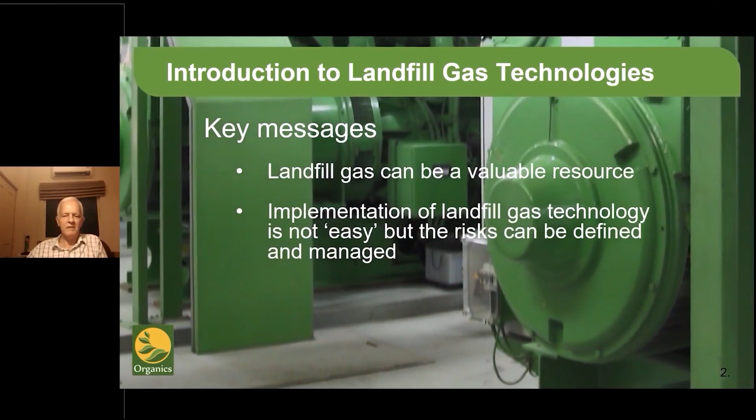There will, in fact, be many key messages in this presentation. However, over it all, the one thing we can say with confidence is that landfill gas can be a valuable and viable resource. Whilst landfill gas is not exactly easy, attention to the major pitfalls that are now well known can ensure both bankability and a successful project.

The Organics Group started out in 1985 when there were still questions about what exactly landfill gas was. An early debate with one customer was illuminating on pipe sizing. Should we use half-inch pipe or 3/4-inch pipe for a landfill gas collection system? That was the question. Emotions ran high as the cost difference was significant in percentage terms.

Eventually, this project evolved to using 10-inch pipes after many years of ever-increasing yields. This highlights how little was known about gas production. From this early caution, we have seen expectations grow exponentially, to the point where landfill gas sites are sometimes seen as gold mines. The truth usually lies somewhere in the middle, although it is fair to say that some projects have been akin to gold mines.

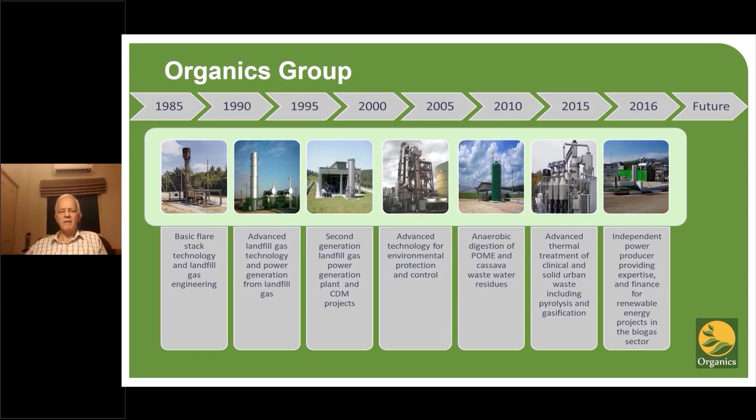There are many people around the world living in luxury off the back of landfill gas. There are, unfortunately, quite a few licking their wounds. From landfill gas, the Organics Group moved to leachate treatment in the late 90s, as well as pyrolysis and gasification. We're now focused on thermal ammonia stripping, refuse-derived fuel, biogas, and of course, landfill gas.

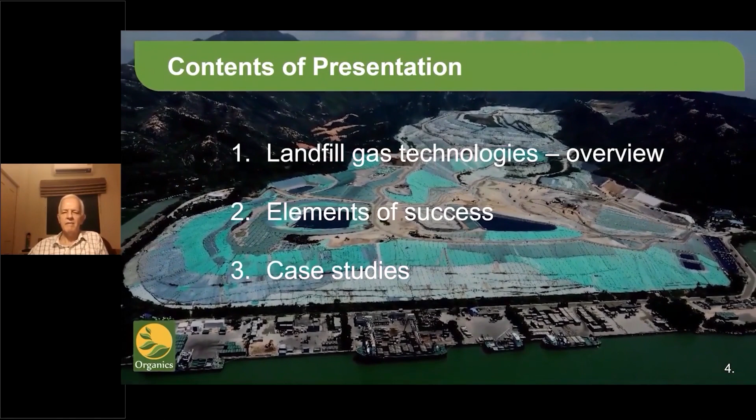The contents of the presentation are split into 3 sections: an overview of landfill gas technologies, a review of the key elements of success within a landfill gas project, and finally, a review of some projects with which we have had an involvement, both successes and ones of mixed performance.

In this section, I'll give an overview of the main elements of a typical landfill gas project. The intention isn't to provide a great deal of detail, but to set out the framework within which landfill gas projects are built and operate.

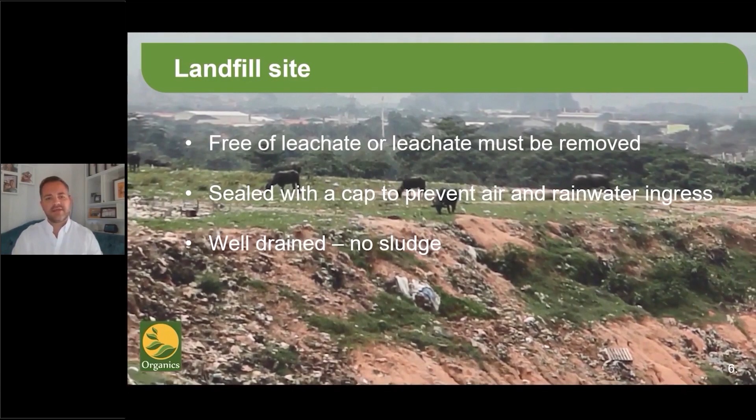Landfill sites come in many shapes and sizes. The main requirement, as far as landfill gas is concerned, is that the landfill doesn't leak. This slide shows one slope of a project where a landfill gas system was installed. Unfortunately, it transpired that the slopes were like giant holes and let in large quantities of air, diluting the gas and killing off the anaerobic bacteria.

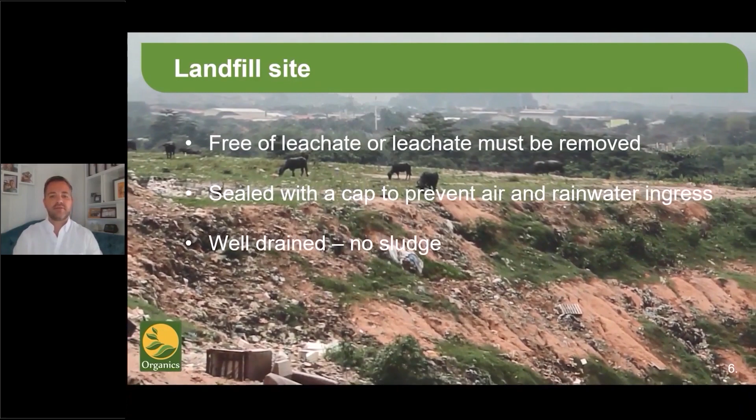So the question is, what's required of a landfill site? First, it should be free of leachate, or leachate must be removed. It must be sealed with a cap to prevent the ingress of air and excessive rainwater. It should be well drained. Landfills filled with sludge are not of any use for landfill gas extraction. There are many other requirements, such as good access and some degree of stabilization, but these are the main non-negotiable requirements.

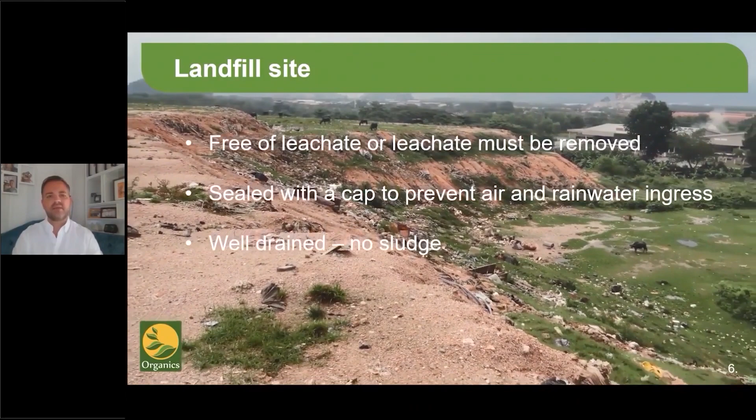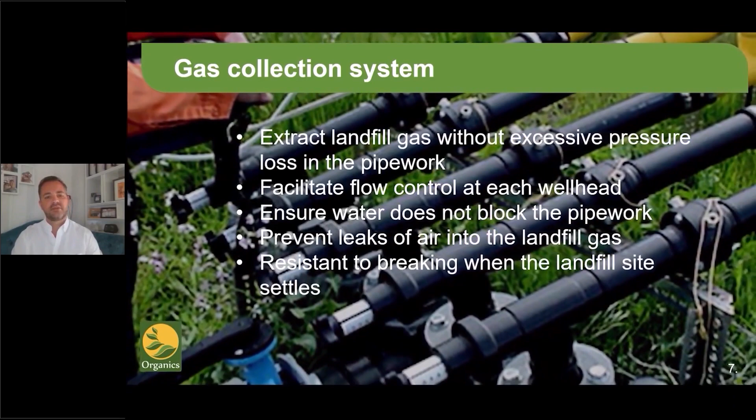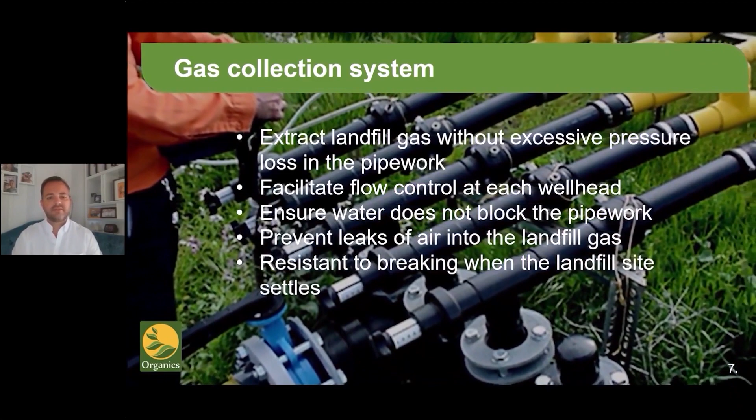One thing that's required is you need to extract landfill gas without excessive pressure loss in the pipework. You also need to ensure water doesn't block the pipework, prevent leaks of air into the landfill gas, and lastly, the system must not break when the landfill gas or landfill site settles. There are many more detailed requirements, but these are just amongst the main ones.

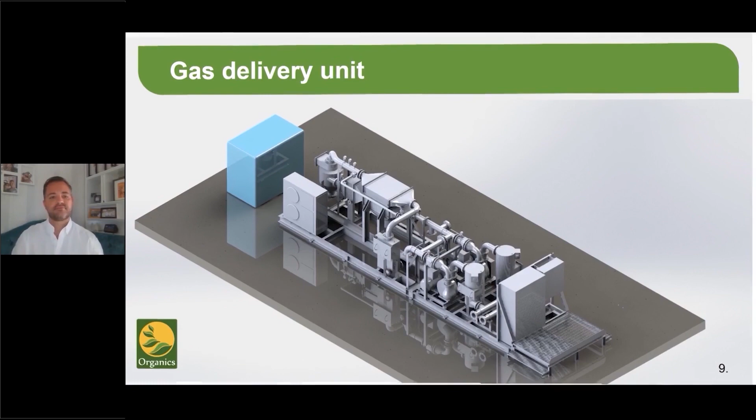Now this view shows the other side of the same unit, where you can see more clearly the counterflow heat exchanger inlet, in which hot gases reheat outgoing cooled gas to drop the relative humidity. The dewatering chiller can also be seen more clearly. It uses a compact finned tube block, which has a high rate of heat transfer compacted into a relatively small space. The blue unit you see there at the end represents the refrigeration unit.

Now, this is for the gas dewatering unit. This is a unit we supplied to China several years ago. In this case, we used a shell and tube heat exchanger for the dewatering of gas, as you can see here. This is a viable alternative, but it just takes up a little more space. The condensate collection pot can be seen at the end.

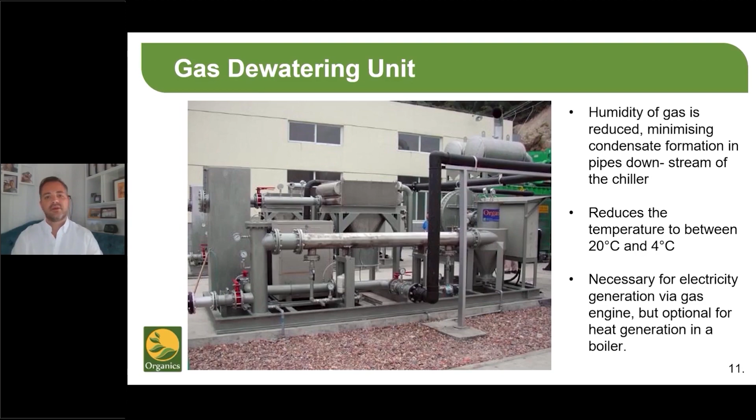We generally like to reduce the temperature down to 4 degrees centigrade, but less than 20 degrees centigrade, it's still workable. The cooler the gas, the better the control of trace gases and moisture.

Now for the gas blower, there are several types of blowers suitable for landfill gas, but generally we prefer centrifugal blowers unless a high pressure is required. So above 500 millibar, the blower may need to be a roots type blower, and above say 1.5 bar, we would opt for a screw compressor.

It can be variable from as small as 50 cubic meters up to 20,000 cubic meters per hour, or even more. So what are the key requirements from a gas blower? The first thing is to facilitate flow control, also to accept a certain amount of moisture, not to corrode, to run continuously for a number of years without breaking down, and lastly, not to leak. So those are some important things to consider.

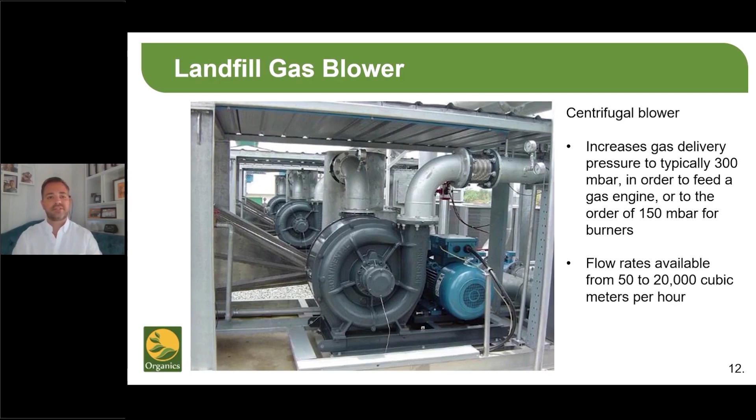Hydrogen sulfide can damage boilers and gas engines very quickly unless it's removed or unless great care is taken while it's being used. The bioscrubber also reduces hazards to health.

Hydrogen sulfide is a very highly toxic gas. Comparatively small amounts can kill you outright. 800 ppm, for example, is a lethal concentration for about half of humans for about 5 minutes of exposure. And concentrations over 1,000 ppm could cause immediate collapse, loss of breathing, and even inhalation of a single breath could kill you.

Now, removing hydrogen sulfide from biogas reduces emissions of sulfur dioxide. The bioscrubber also reduces noxious odors. A typical bioscrubber can remove about 98% of hydrogen sulfide in biogas. Basic requirements of a biogas scrubber include reducing H2S to levels of 200 ppm typically. It should not be expensive to operate, needs to be cost effective, and to minimize downtime.

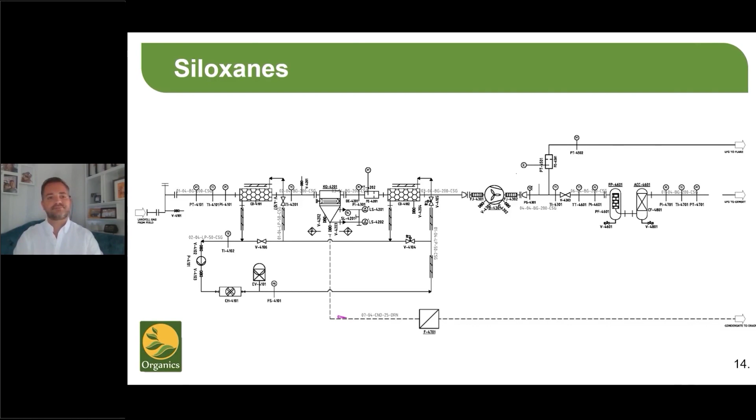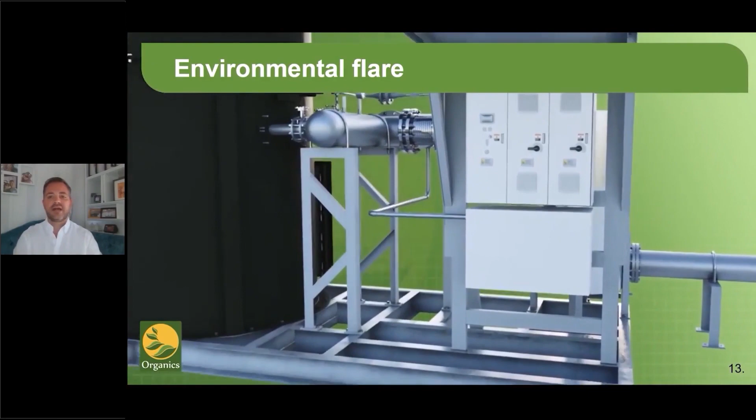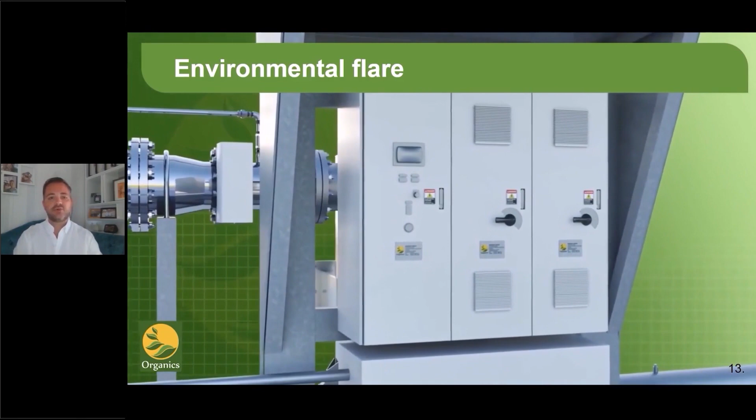It started out in this form to tackle landfill gas trace gases, such as benzene, halogens, and vinyl chloride, all of which can be detrimental to human health. Now, more recently, it's been used to control emissions of methane for greenhouse gas control. Open flares can have up to 15% methane bypassing the flame, whereas in this case, destruction of methane can be well over 99%.

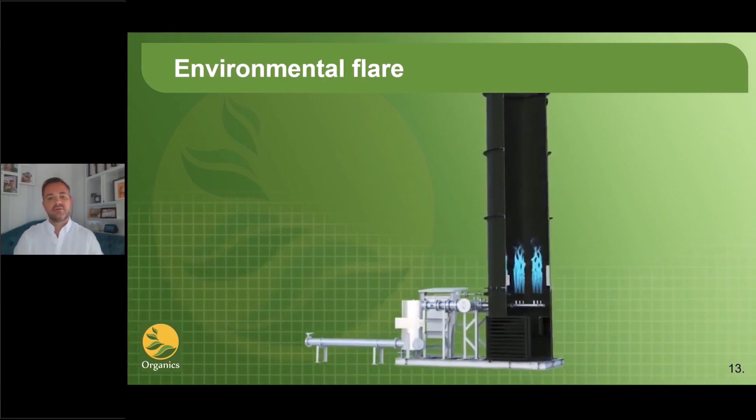Is held at a minimum temperature, typically around 1,000 degrees centigrade, for a minimum period at this temperature of 0.3 seconds. So these are the standard conditions required to be met by the UK Environment Agency.

Where it is viable, that means there must be a viable FIT, or feed-in tariff, as well. So in such a situation, there needs to be a reliable off-taker who will take 100% of the power produced in a 24-hour period.

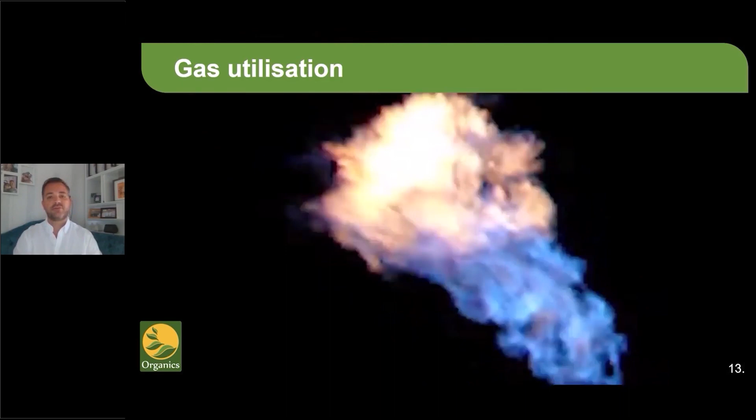Hi, I'm going to cover some of the elements of a successful landfill project. I'm going to cover management, feasibility studies and design. My colleague Brian Johnson will cover construction and operation.

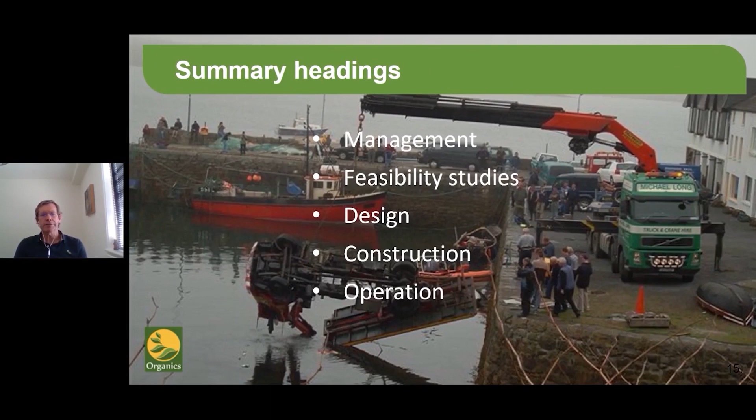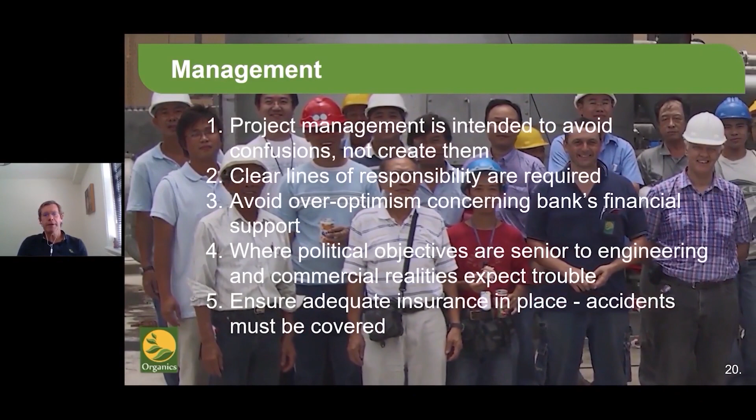In terms of project management, it's intended to avoid confusions, not create them. Clear lines of responsibility are required between the parties, including owners of the landfill, the equity partners in the landfill gas energy business, normally referred to as perhaps the IPP or independent power producer, the lenders, the technology providers, and the overall system designer and integrator.

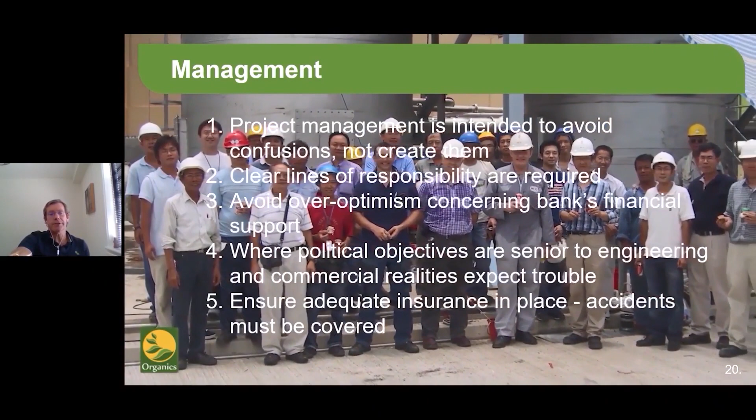We need to avoid over-optimism in terms of overstating data when it comes to attracting equity and investors and the bank's lending support. And where political objectives are senior to engineering and commercial realities, you can expect trouble. And last but not least, need to ensure adequate insurance is in place. Unforeseen events and accidents have to be covered.

Clearly, the feasibility study is the start of a project, and it's extremely important to get it right. In terms of the things that needed to be covered, it's essential to correctly estimate the ongoing maintenance costs in advance. The project has to have an adequate feed-in tariff, and really it needs a very robust and correctly interpreted financial model.

There has to be a viable leachate management plan in place, and a good capping for the overall site is essential. It's important to look at the history of how the landfill's been maintained and planned, and correlate that with what's on the ground. And finally, a correct gas production estimate is critical.

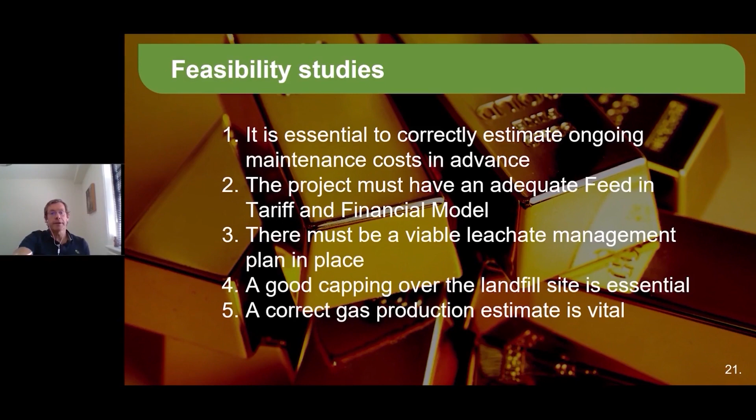Now, talking about gas production estimates, there's quite a lot of information to consider, but you need an honest interpretation of the mathematical models, decide whether a pumping trial or no pumping trial is going to be required, avoid optimistic interpretations of results in the initial site assessment. A valid assessment of waste degradation curves and yield modelling is important.

Accurate waste tonnages and composition. Pressure from investors to enhance the gas production expectations mustn't be supported. Correctly define the genset's efficiency and availability, and carefully check the landfill history for fires, etc.

Look for signs of ongoing or unaddressed fires. Typically that might be elevated levels of CO, carbon monoxide, or hydrogen, or indeed hotspots that may be obvious on the ground.

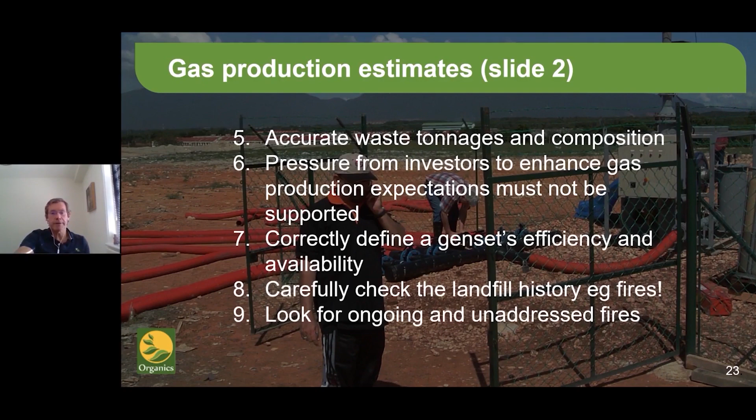Regarding landfill gas production curves, there are 5 distinct phases of waste decomposition within landfill, following the arrival and deposition. The first phase is relatively short, being the aerobic phase where free oxygen is consumed by aerobic bacteria, and the production of hydrogen commences at the same time.

Once all the oxygen is removed, the waste decomposition moves into an anoxic phase where carbon dioxide is produced. This can last up to about 6 months. The third phase represents the commencement of methane production, the reduction of carbon dioxide production, and it's the commencement of the growth of the methane-producing bacteria.

Phase 4 is the full methanogenic phase, where methane is produced in the maximum quantities and the gas can be recovered from the waste. In the final phase, methane production starts to decline. When this happens is extremely variable. The rule of thumb is 7 to 10 years, but it could be as little as 2 or 3. The duration of all these cycles can be anywhere from about 10 to 80 years or more, depending on the quantities of waste in the landfill.

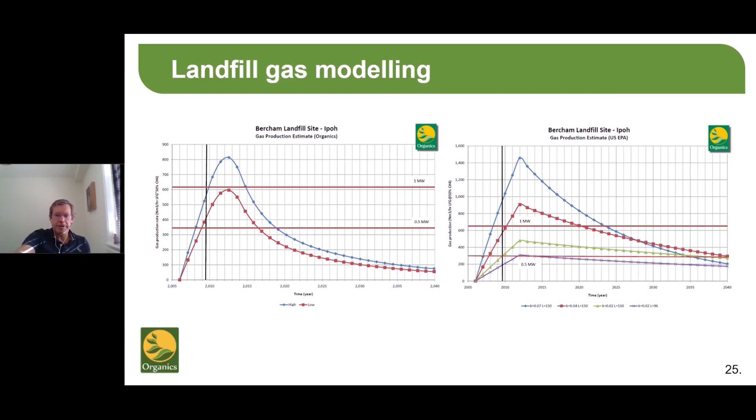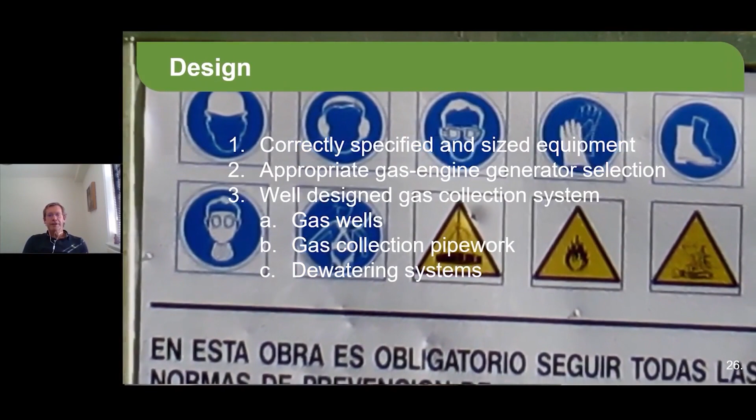In terms of design, this is of paramount importance. Landfill gas technology is largely well defined with many suppliers. It's the integration of the systems where the problems arise. It goes without saying that equipment should be correctly specified and sized, but it remains an area of difficulty too frequently encountered. The gas engine must be suitable for landfill gas and should be well proven and have a good track record.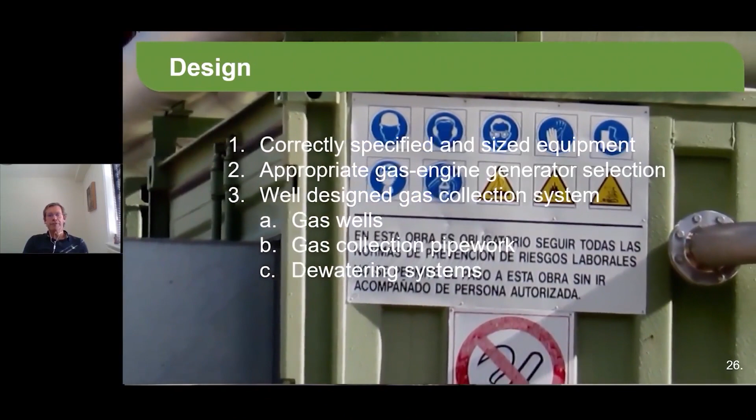Similarly, collection of the gas and the fuel transport system should be built for purpose. Gas wells sunk into leachate, for example, will not produce landfill gas, obviously.

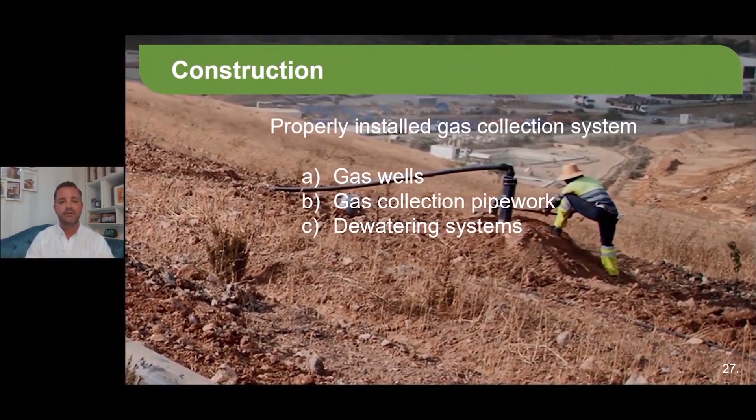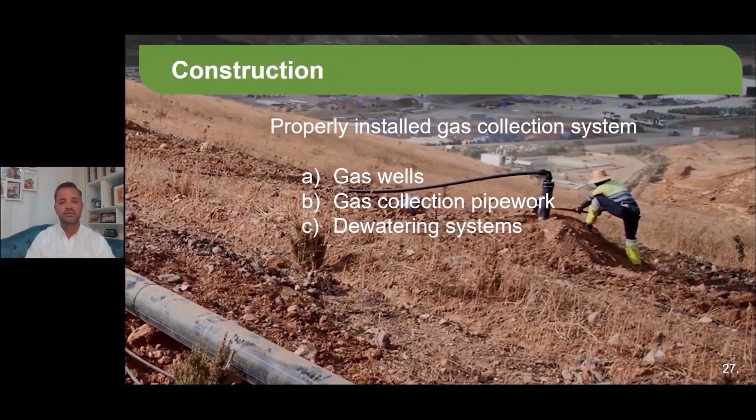We would all like to think that construction wouldn't be a source of fundamental difficulty. However, some issues that can be encountered include wells not drilled to the required depth, but simply to first contact with leachate; horizontal pipework laid flat, resulting in water sealing when settlement occurs; dewatering points out of which water cannot flow, leading to the dewatering pot flooding. Another issue is full-face gaskets left in a pipe, blocking all flow from that leg of the gas field, poorly found and out of sight, and lastly, incorrectly sized pipework and valves blocking collection flow.

So that's just to name a few. It's clear that construction works should be monitored and recorded. A good design can perform like a bad one if it's installed incorrectly.

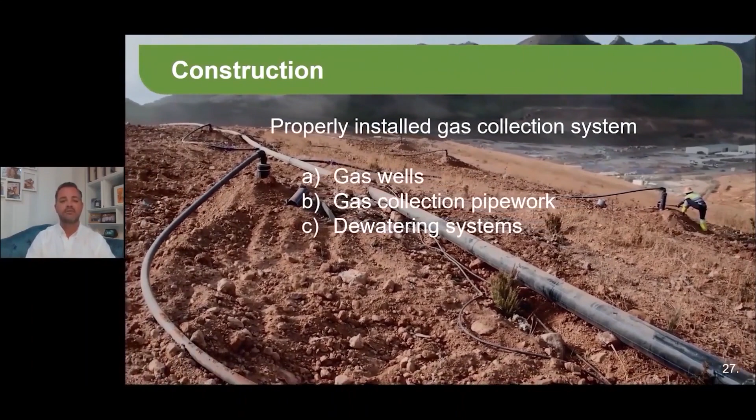It's often said that a good operator can make a poor installation run well, and that a bad operator can destroy a good installation. After assessing feasibility, designing and installing a good system, it will now be critical to ensure operation is attended to with equal attention to detail. There are many aspects that come into play here. This and the next slide highlight some of the main issues encountered, which need to be attended to for operation of a landfill gas project to be successful.

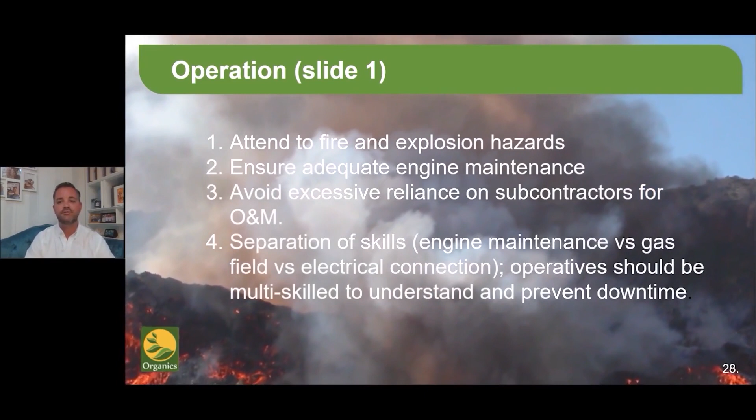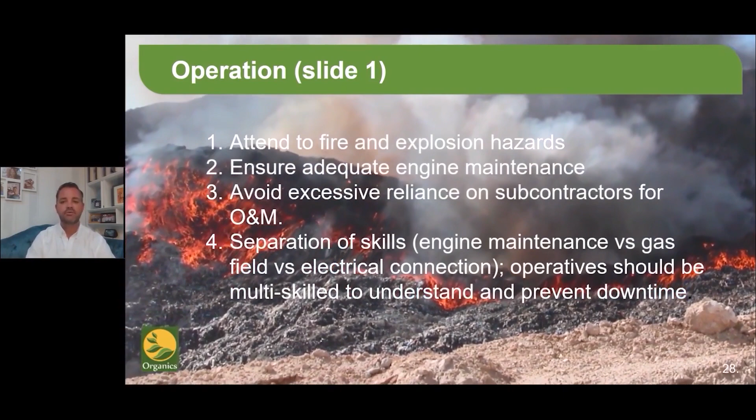Fires, engine maintenance, and the like are basic. Because landfill gas requires multiple skills, it's important to have in-house technicians who can work across technologies. Subcontracting out skills should be undertaken with great caution. For example, if there's a problem with a gas well which translates into a problem with the gas engine, an engine technician may or may not understand what's going on. But a staff member who works with the gas collection system and the engine will see the connection immediately.

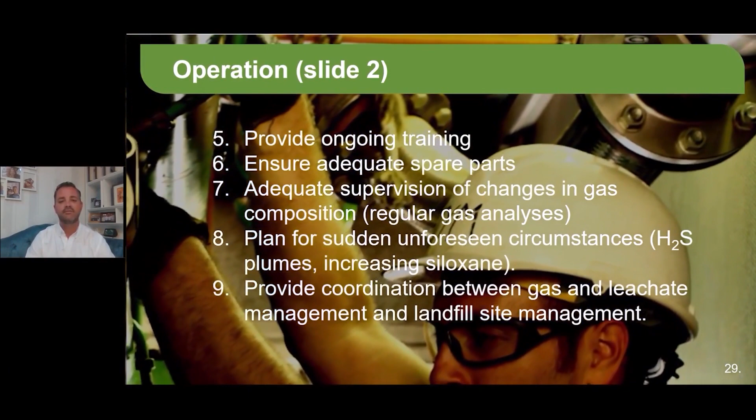So to this end, staff training should be recognized as fundamental and should be ongoing. Site technicians will never learn everything about a system, but the more they learn, the less downtime is experienced and the more job satisfaction they will have. Being ready for the expected and the unexpected can be planned for, so if and when this does happen, it's immediately and comprehensively addressed.

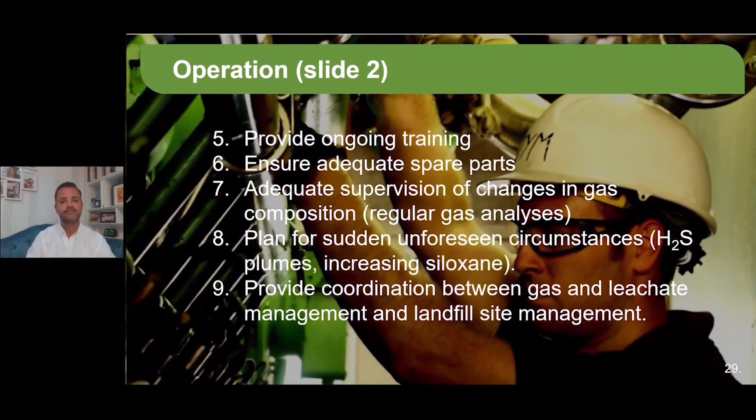One problem that's often encountered on active landfill sites is the coordination, or lack thereof, between the landfill gas operation and the landfilling operation. Problems can always be managed professionally through regular coordination and cooperation. Hoping for the best shouldn't be a management strategy.

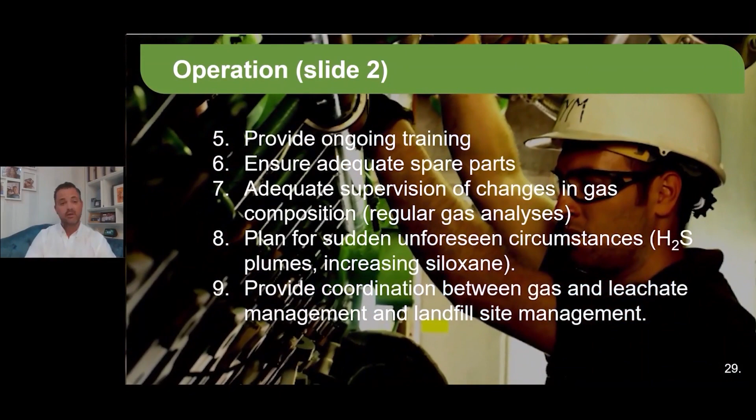Leachate, unfortunately, is a problem that must be addressed in many landfill sites. Even with good basal draining, perched leachate will still be found and generally provide difficulty in extracting landfill gas. Leachate must be managed from the outset.

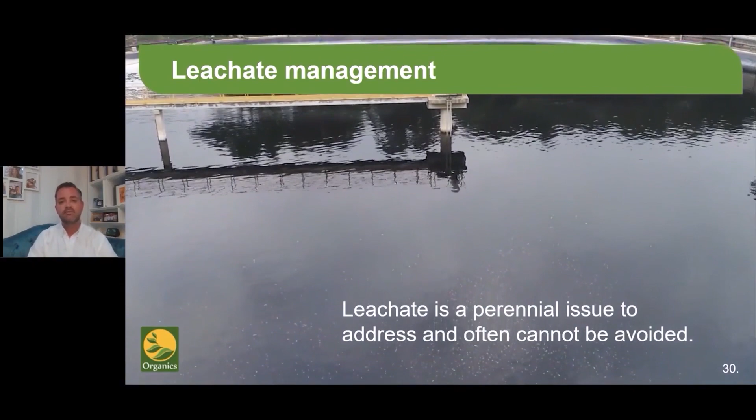If necessary, it may be removed using gas wells. Once removed though, it needs to have somewhere to go. It's sometimes surprising how much leachate comes out of a site. So this may result in the need for holding lagoons and treatment facilities so the leachate can be discharged to a watercourse or wastewater treatment works.

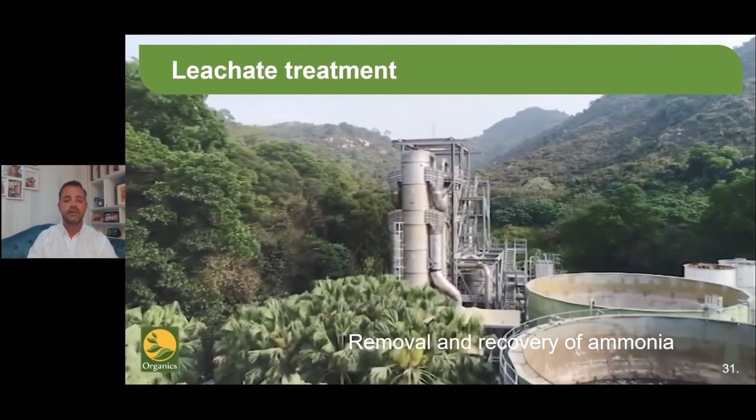Leachate treatment is a huge subject in itself, but suffice to say, treatment since the early 90s has most commonly found that the activated sludge process is the dominant technology used, in various forms. A sequencing batch reactor is one such system that is used.

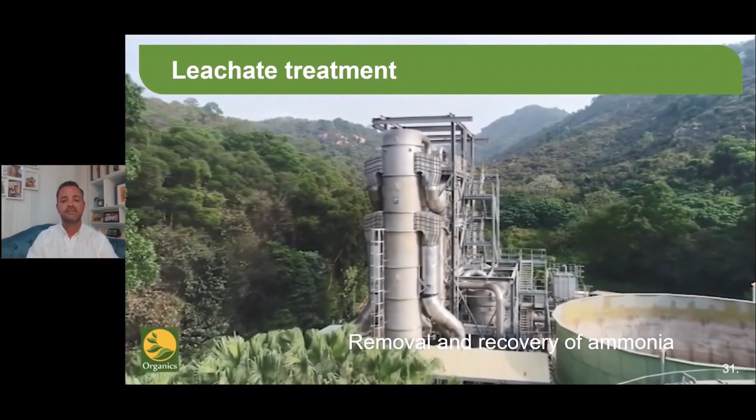This can be added as a separate piece of equipment for removing ammonia and other trace compounds, such as heavy metals. Organics has also developed a patented thermal process, which can run on the waste heat of gas engines to remove ammonia and recover it for use or sale as a traded commodity.

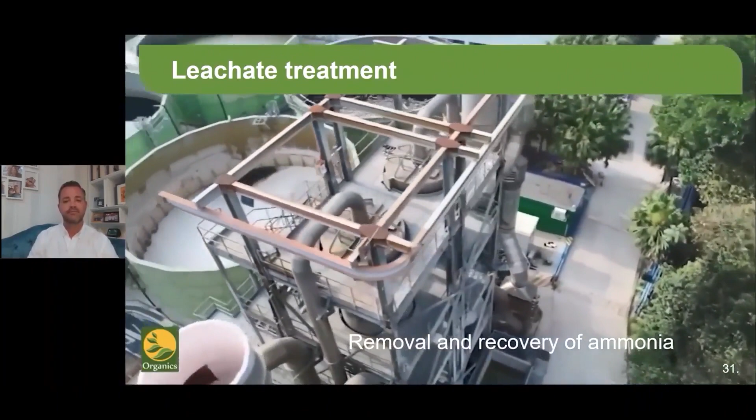There are several brands of engines which have a proven track record running with landfill gas. Jenbacher and MWM Caterpillar are a couple of the main ones. Other engine suppliers such as Guascor or Shandong are also gaining traction in the market.

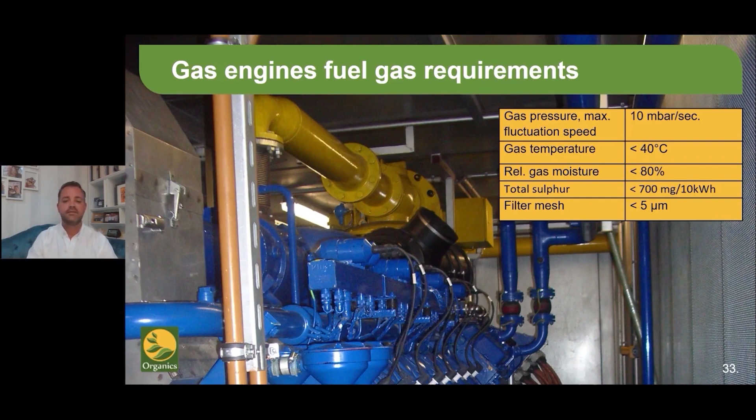Siloxanes are another engine gas contaminant that can seriously damage a gas engine. It's the nature of the beast that siloxanes can appear or disappear from a specific landfill gas flow. So care is always required to see the telltale signs, which can be seen in the oil, in the piston heads, or the turbocharger.

In this part of the presentation, we'd like to bring you some real-life experiences with projects from various parts of the world.

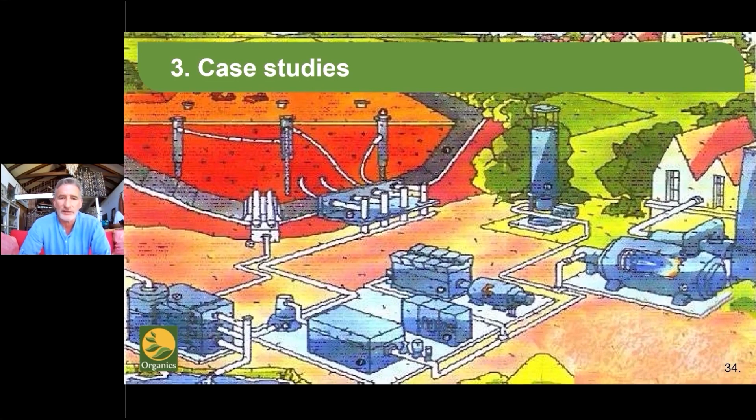Analysis as to what went well and what went wrong is not something that we can do in such a short discussion, but we can give some of the main headlines, such as how much waste was in place, how much gas was anticipated, and how much was actually achieved. There are a great many successful projects in operation now in many countries, but there has undoubtedly been quite a high rate of failure for reasons previously discussed by my colleagues.

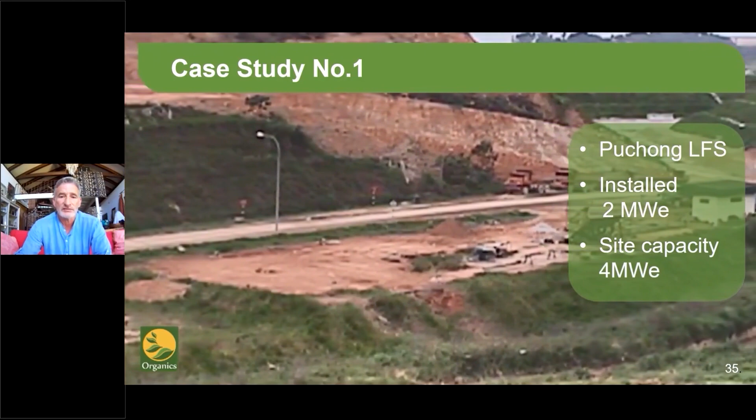In this first project, this is an early image of the Puchong project in Malaysia, taken shortly after commissioning. A feasibility study was performed by the client, TSPL. It was agreed to install two 1 megawatt Jenbacher gas engines, and the site was active and had about 4 million tons of waste in place. So according to the rule of thumb, it could have produced 4 megawatts.

The project was a technical success with plenty of gas. There was a requirement to remove leachate from the gas wells, and this was done very easily. The project won first prize in the Renewable Energy Project Competition on-grid category at the 2005 ASEAN Energy Ministers Meeting in Siem Reap, Cambodia.

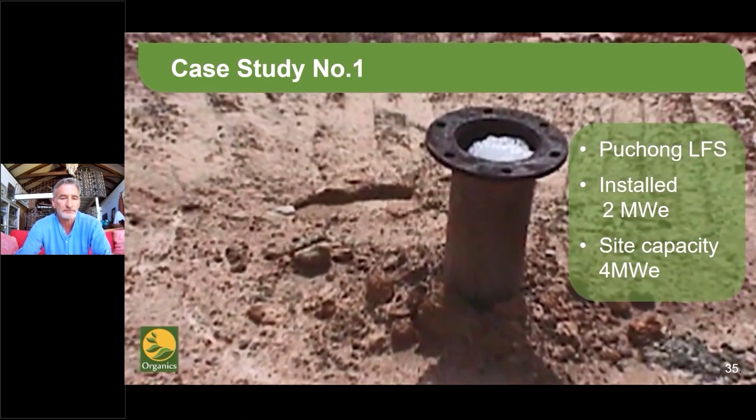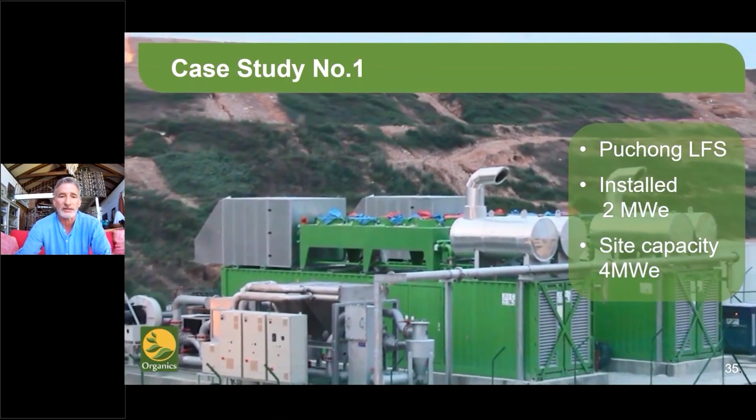One difficulty that did arise was that the feed-in tariff was quite low at the outset, feasible but low. During implementation of the project, the euro rose in value, and the budget set in Malaysian ringgits was stretched to the point that the operating budget was used to pay for capital equipment. This resulted in some difficulties during operation, but I'm happy to say that these were resolved, and the project is still in operation 15 years later.

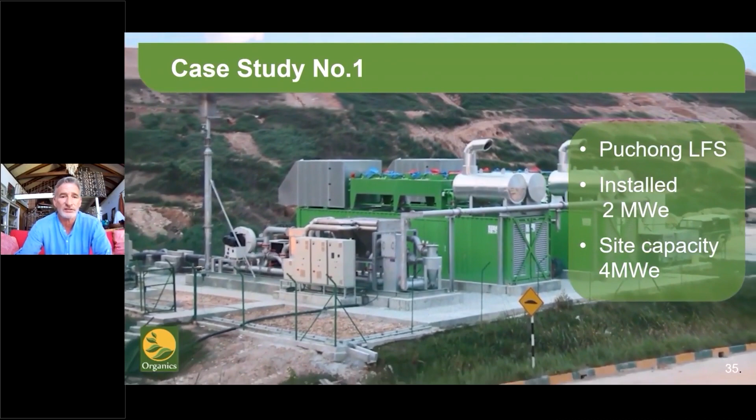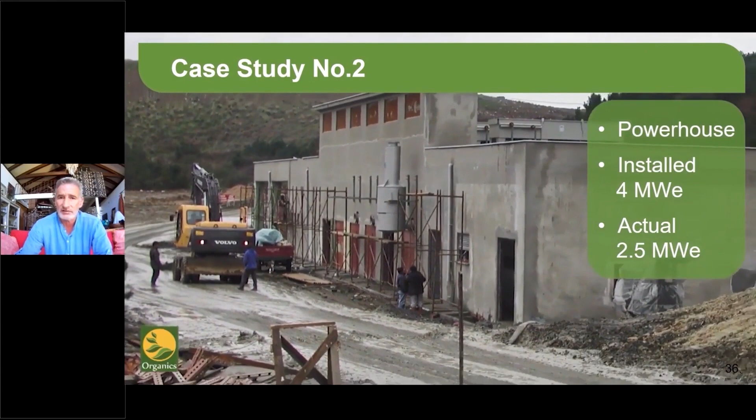The next example was a project built in Turkey in the year 2000. The waste in place was in the order of 6 million tons. A pumping trial was performed by others, and the results indicated that 6 megawatts could be generated. So it was decided to install 4 to be on the safe side. These were 1 megawatt Jenbacher gas engines, and space was left for an additional 2 engines as long as there was adequate gas.

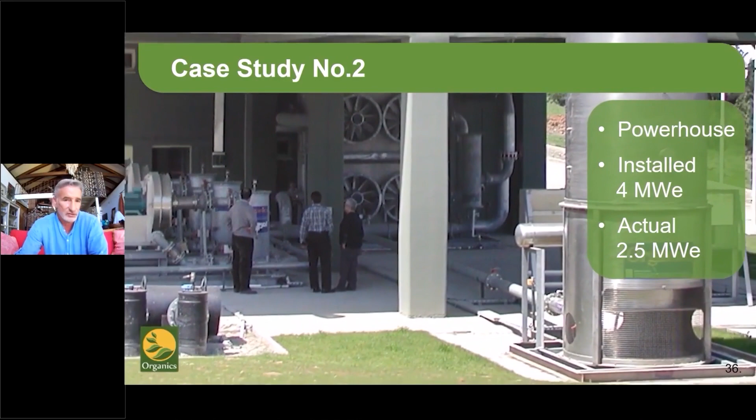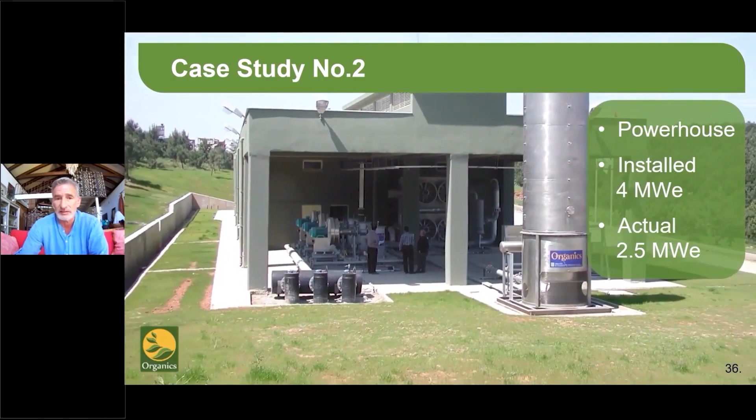In practice, after everything was installed and operational, it was found that the maximum capacity that could be generated was 2.5 megawatts. The shortfall was probably due to the fact that the pumping trial didn't cover the full area of the landfill, and the missing sectors were probably not as productive in gas generation as the ones tested.

Nevertheless, as the project was owned by the city of Istanbul, where a certain Recep Tayyip Erdogan was the mayor, the project was declared a success and continued in operation.

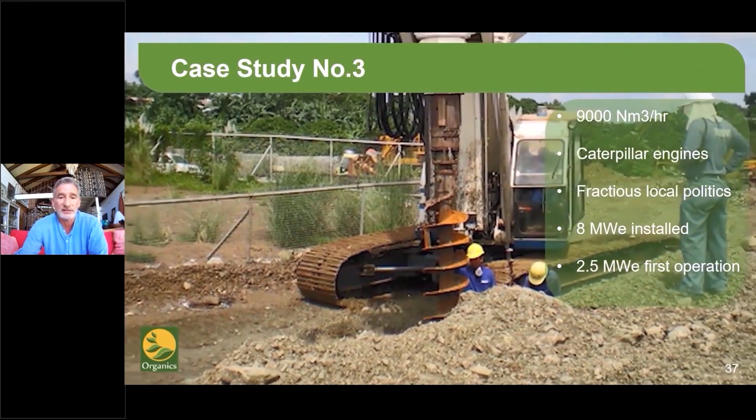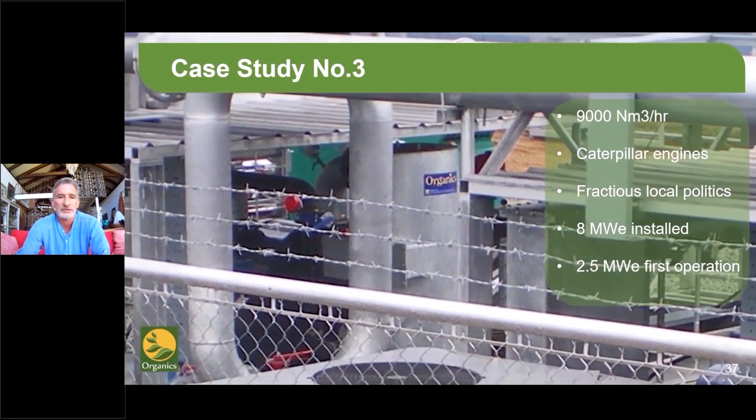The next project was installed on a site where a pumping trial carried out by others had indicated that the generation potential was 35 megawatts. There were approximately 6 million tons of waste in place. Following organics involvement, this was revised down to 4 megawatts, a maximum quantity. In theory, the site might have been able to produce 8 megawatts if the waste had been landfilled correctly.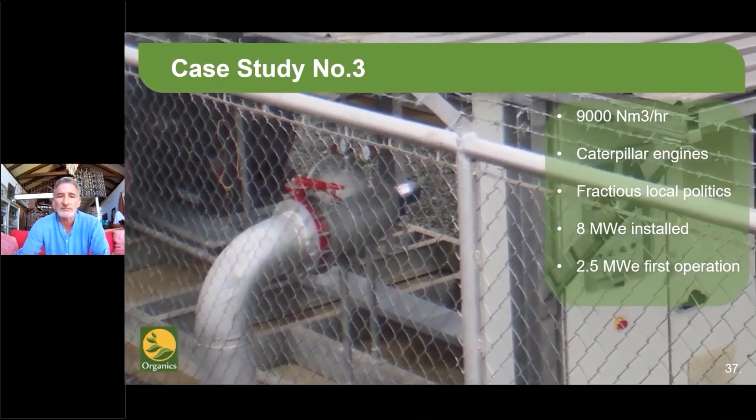But in fact, it had been an open dump for much of its life. In the end, pressure from the investors led to 8 megawatts being installed, and at first operation, the site produced only 2.5 megawatts. The great saving of this project was that the site was active, and the waste coming in was coming in at the rate of about 4,000 tons per day. It eventually reached full capacity and is still in operation.

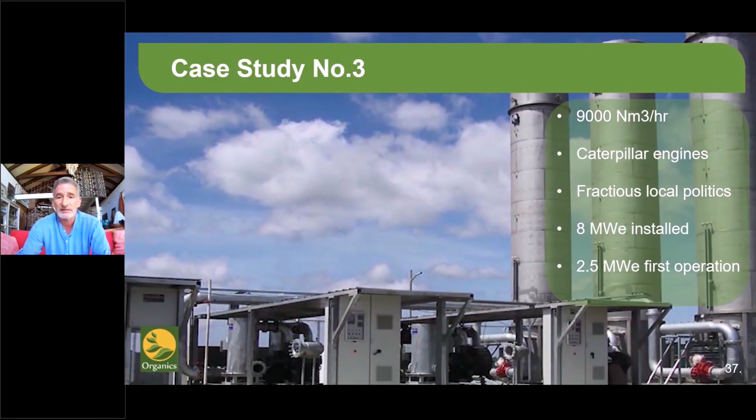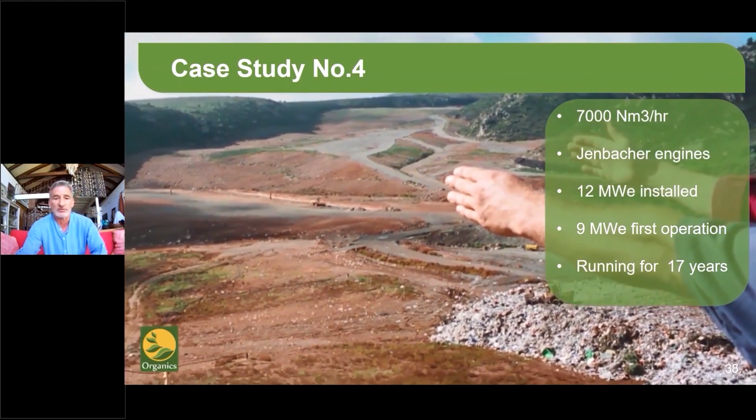Our next case study is a landfill gas utilization project installed at the Garraf landfill site near Barcelona, Spain, a landfill with around 40 million tons of waste in place. After a public tender, 12 1-megawatt Jenbacher gas engines were installed and commissioned in 2003.

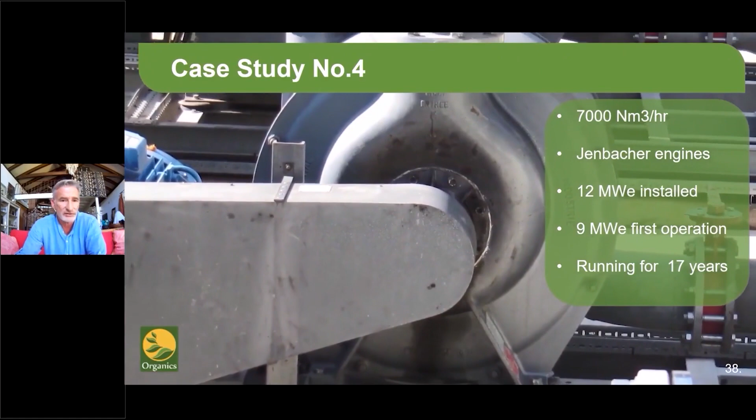The site was closed to waste input in 2006 and restored to a high quality, a process that involved importing large quantities of earth. This caused the leachate in the site to rise up in the gas extraction wells and reduce the collection efficiency of the gas extraction system.

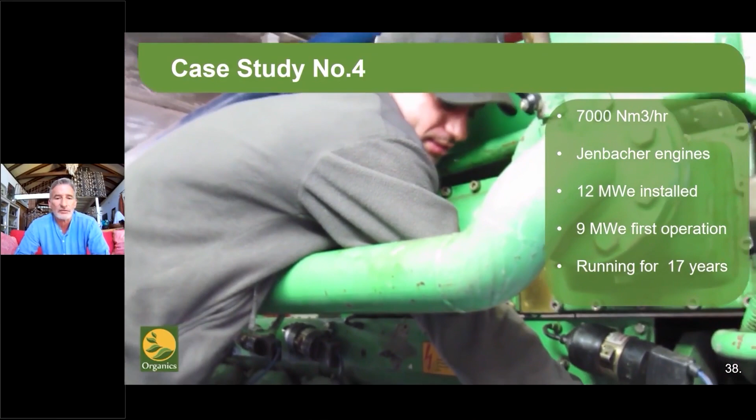During the commercial lifetime of the project, the maximum number of engines achieved was 9 megawatts. However, due to the acceptable feed-in tariff, the project was successfully operated until the end of the contract, after which the plant was transferred to the city council.

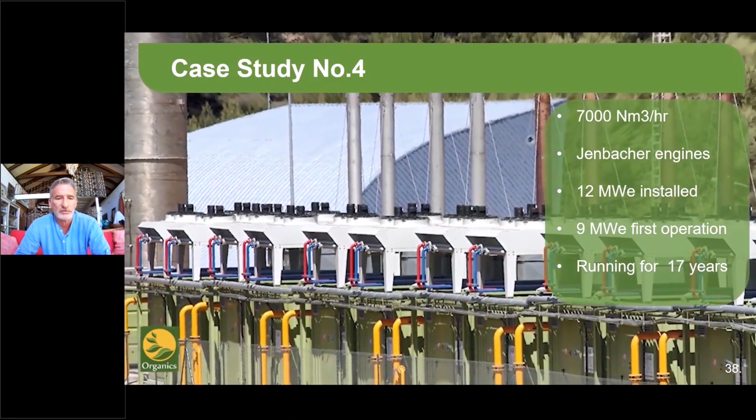As the site was closed in 2006, the gas generation curve began to decay almost immediately, and the project is now producing 2 megawatts, although new extraction wells are being installed to capture any additional gas that may be generated.

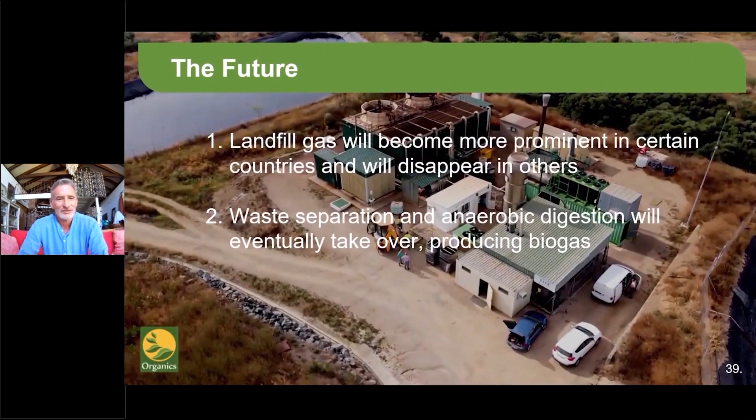So what of the future of the industry? Landfill gas technology is mature, and it's been shown that with judicious management and proactive legislative support, projects can be commercially successful, although it's highly important to understand the risks involved.

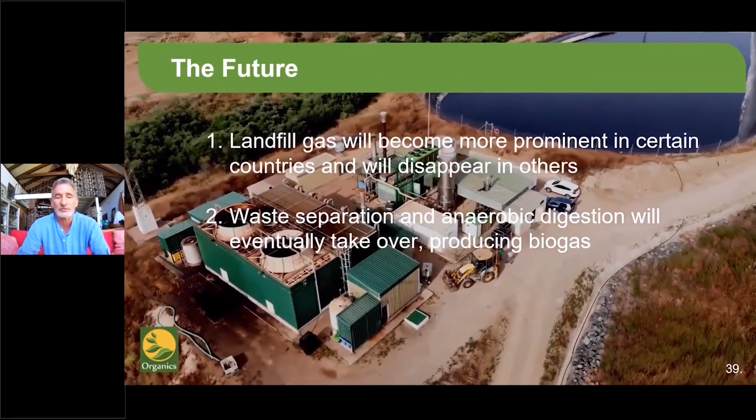There's little doubt that landfill gas management will remain an important consideration in those places that still accept organic waste to landfill, such as Malaysia and Indonesia, but will decline in importance in places where organic material is not permitted to be landfilled, such as in Europe.

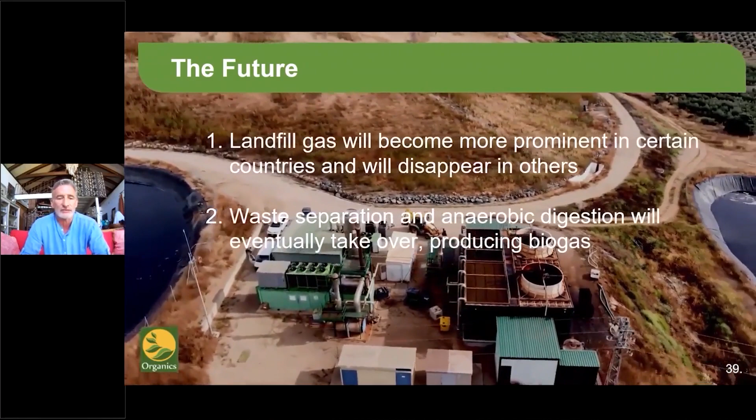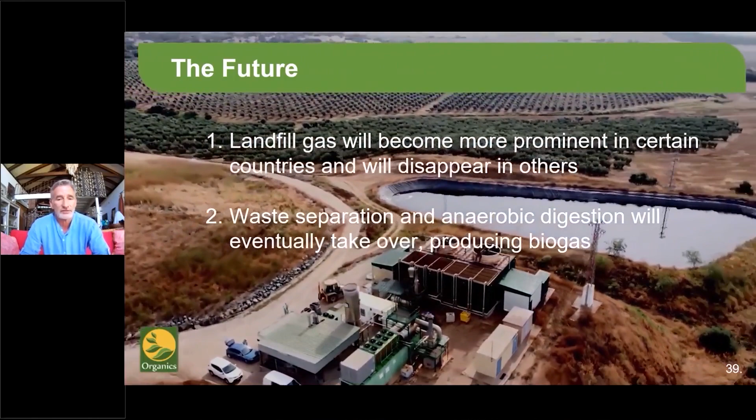Organic material is more frequently being separated, and technologies using anaerobic digestion and other mechanisms will eventually take over producing biogas. But there remains no doubt that for the foreseeable future, landfill gas management will be required to ensure that a highly destructive greenhouse gas is not released in an uncontrolled manner to the atmosphere.